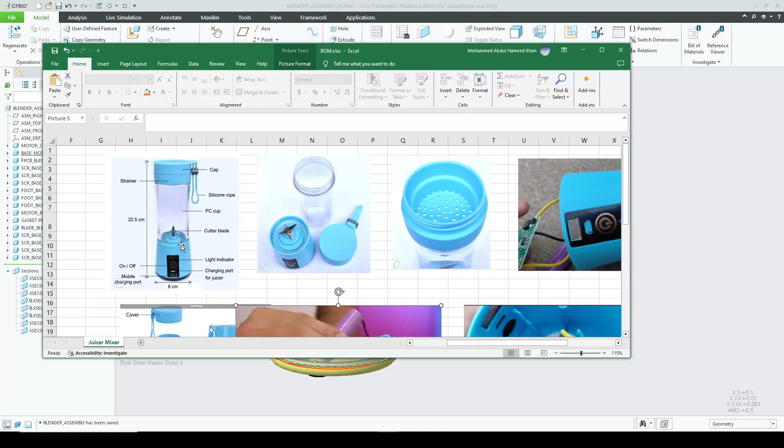Now let us work on creating the middle part of the blender, which is the cup. If you look at the cup, it is basically assembled to the base with the help of threads, and it also has threads on the top side for the strainer and cap to be connected. So it's a very simple design with threads on both sides. We just have to ensure that we provide the arrangement of the threads.

Now I'll just move to the first body blender we have created. From this I'll save as the middle part, the cup. I'll write it as cup blender and press OK. I'll just open the cup blender individually.

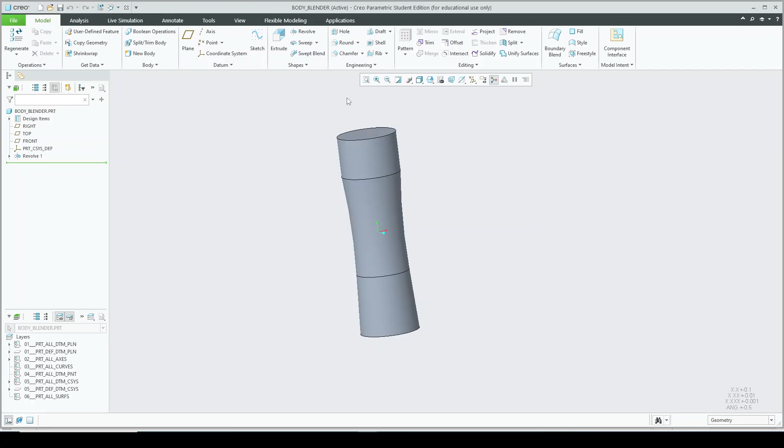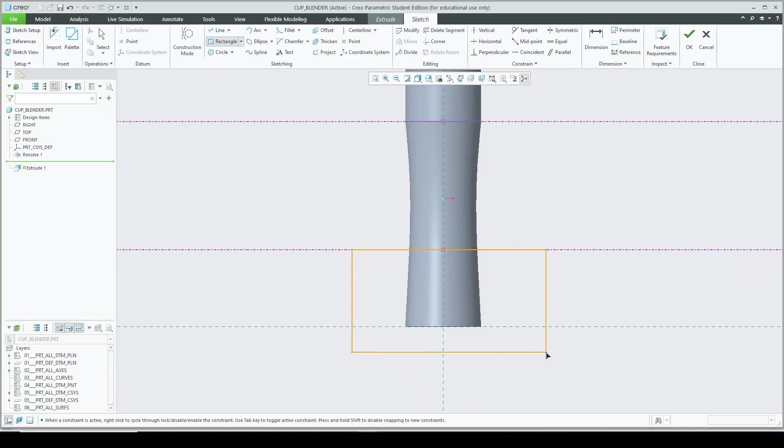Open cup blender, and I'll remove the top and bottom parts because these are already created. A large extrude from the top and bottom. We can ensure that these are strong dimensions. So this will be our cup, and I'll just save it.

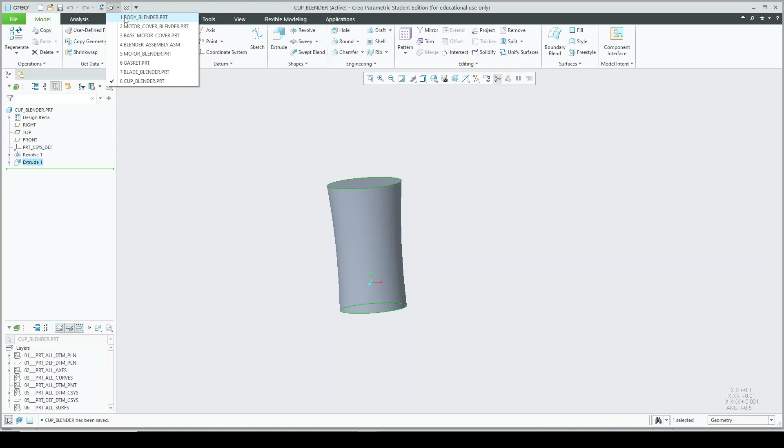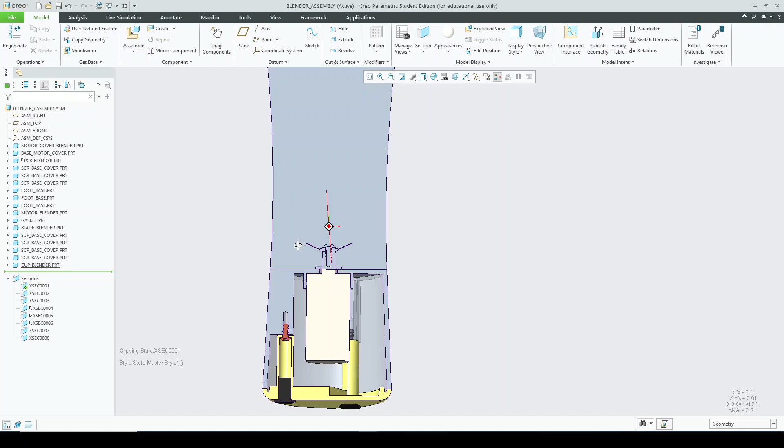Now I'll import it in the main assembly. I'll go to assemble, insertion, cup, open it, press default constraint, and go to the cut section view. So this is how our cup will look like, but we have to shell it first. I'll activate this and click on shell.

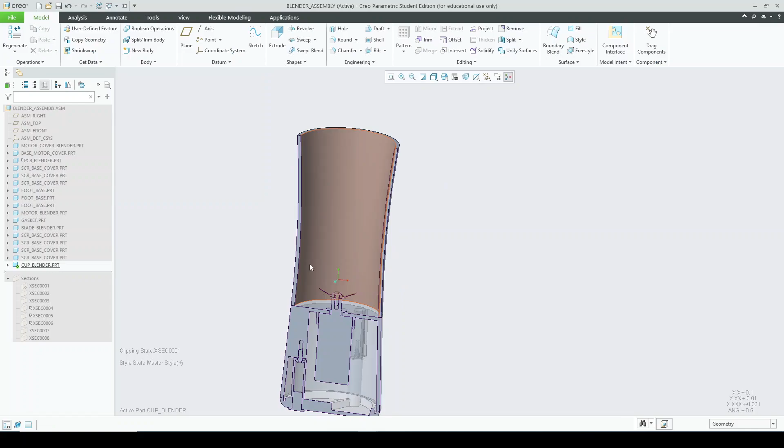It will remove the material from top and bottom as well, and I want the thickness to be 0.1. Let me press OK and turn on the assembly. This is how the cup will look like.

But where do you think it can thread at the bottom? So on this enclosure we need to have a wall. Let me create a snip over here. We should have a wall in the enclosure that comes in contact with the cup. So we should have a wall with threads, and the threads of the wall will come in contact with the threads of the cup, and it basically joins together to get assembled.

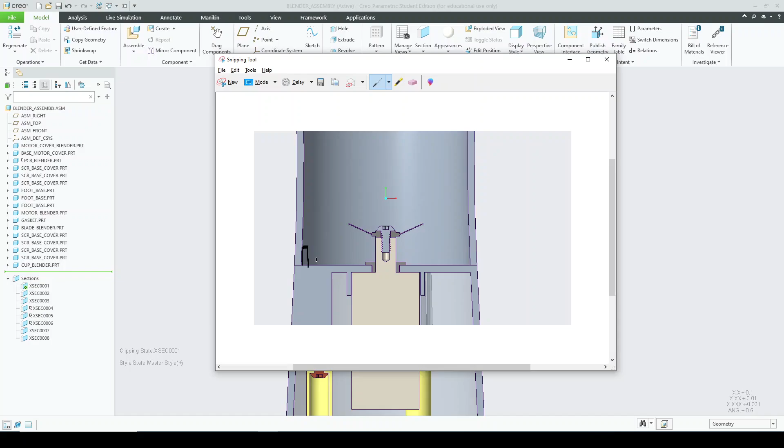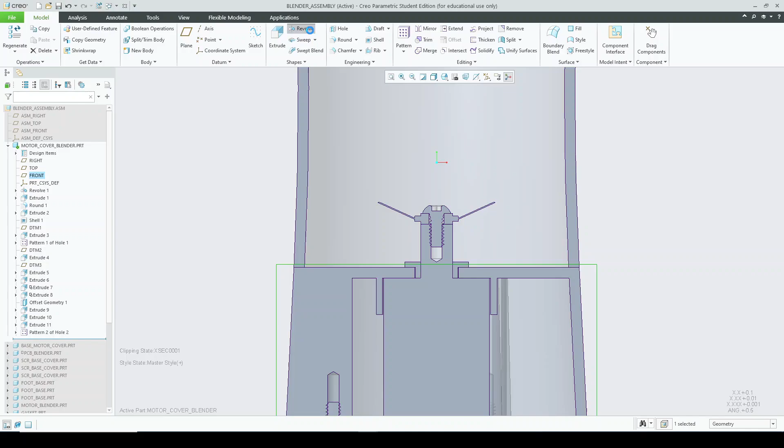So I'll be creating or activating this enclosure again. You can understand the enclosure, or the cover, the motor cover, is a very significant part because it accommodates plenty of features. Firstly, I'll add the center line.

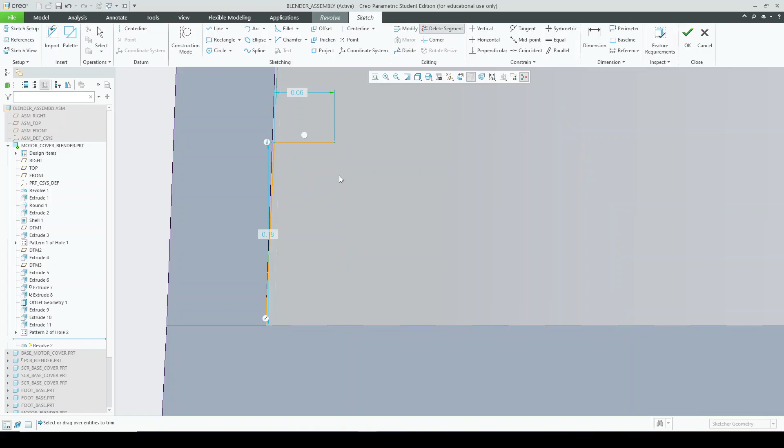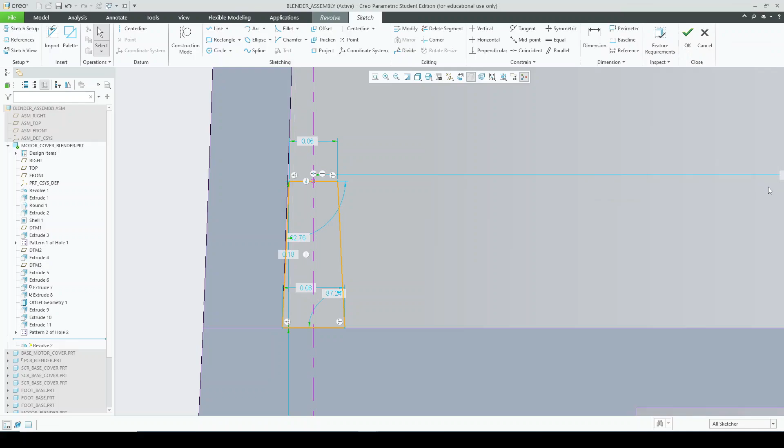This is done. Create a rectangular wall. Maybe I need to create a slanted wall. I'll just delete this center line, sorry, not thicken. Select this and mirror it. And join it, so this is a closed loop with no external references. I need to corner it.

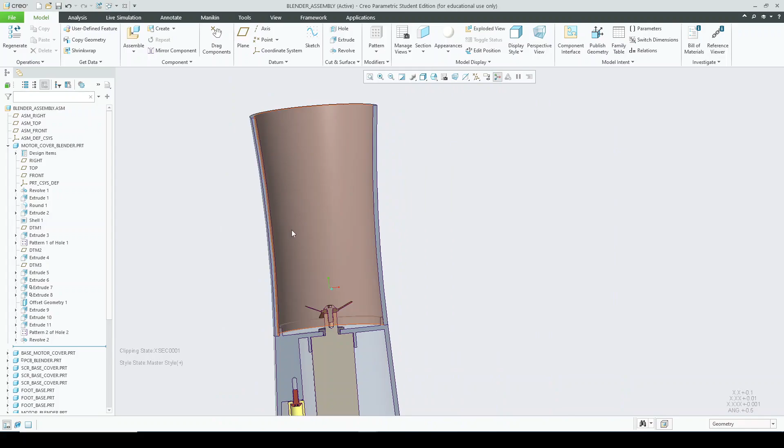Select this and designate it axis of revolution. So this is how you'll be having the inner wall of the motor cover, to which the cup comes in contact. The customer has to rotate it, and both the threads will come in contact and get assembled perfectly.

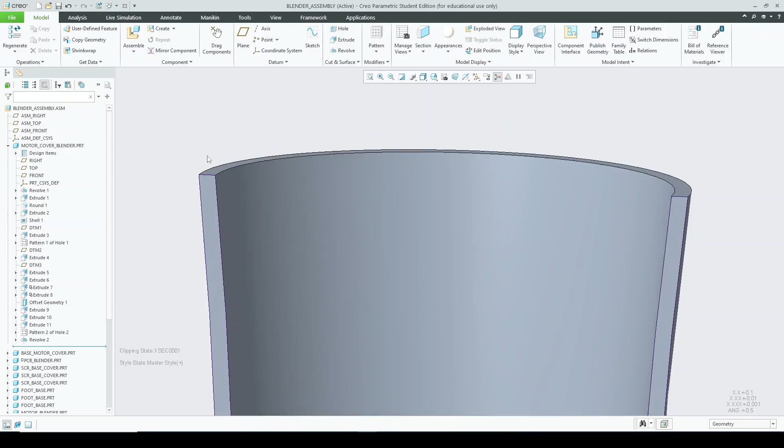Now at the top we need to add a few features for the strainer. We need to add the thread for the strainer on the top. So what I'll be doing is activating this cup blender, go to the front view first, and kind of revolve.

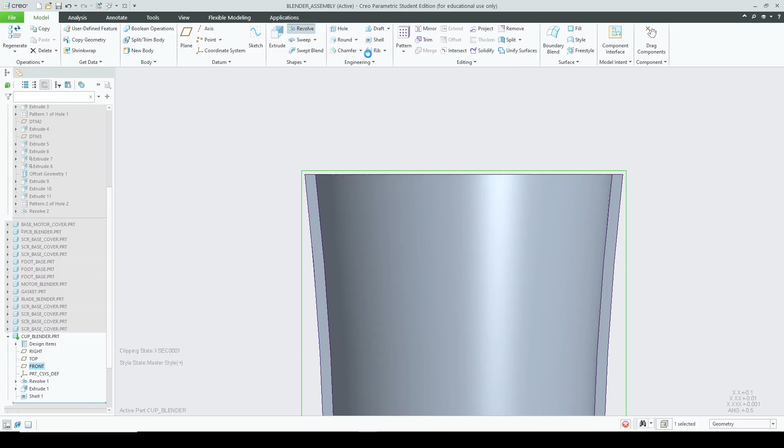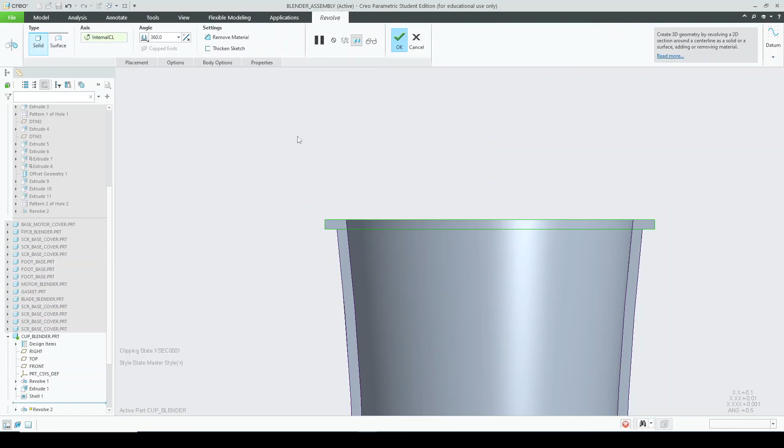One feature, kind of extension, designated as axis of revolution, and on this I'll be adding another wall. So I'll be revolving again.

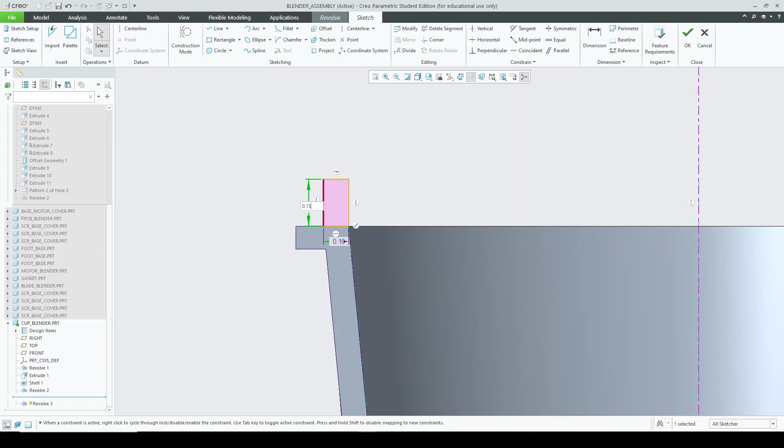Revolve it from the center and create a wall of 0.1 diameter, 0.15 length, designate as axis of revolution, press apply and OK. So you'll be having another thread on the top wall which I have created.

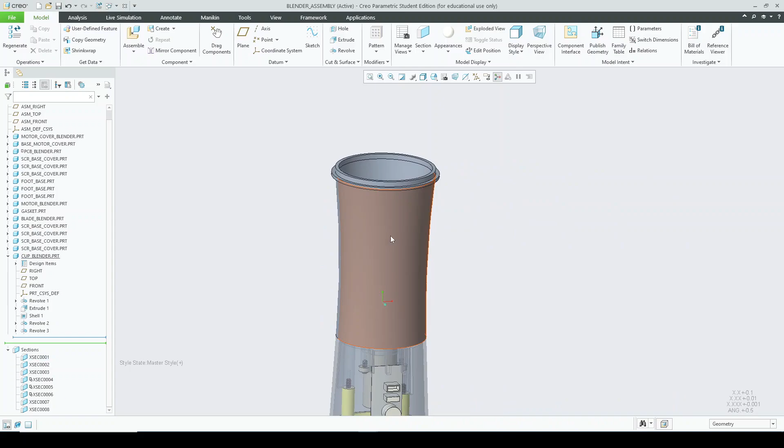This is how our cup will look like. Technically this has to be shaded and this has to be transparent. Now let's work on creating the upper parts of the portable blender.